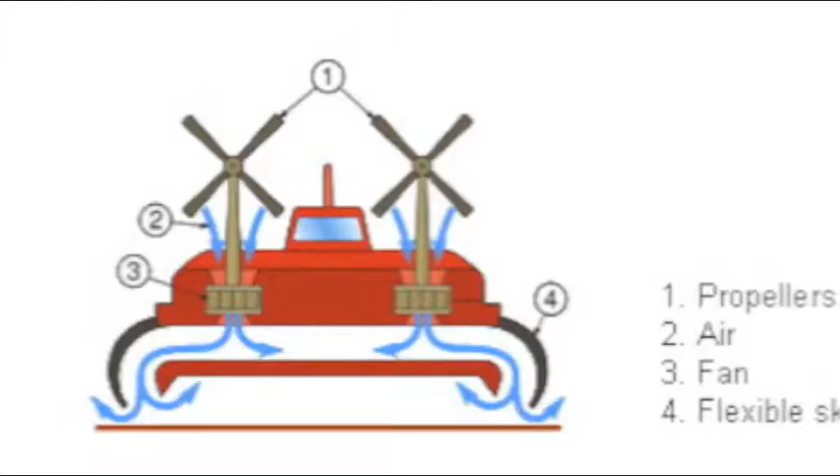First, we researched the history of hovercrafts. We looked at different hovercrafts made in previous projects. We then had to figure out how to use the different electronic parts such as servos, receivers, speed controllers, and motors.

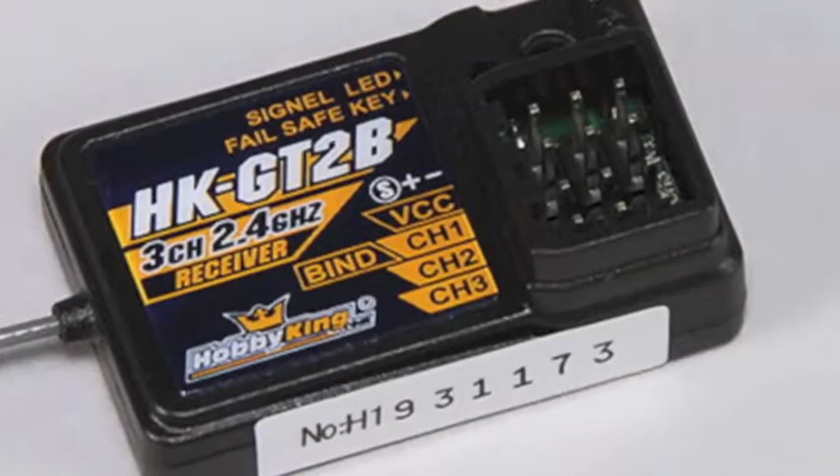For the design of our hovercraft, based on our team's research, I sketched out a blueprint that was a blend of hovercraft models.

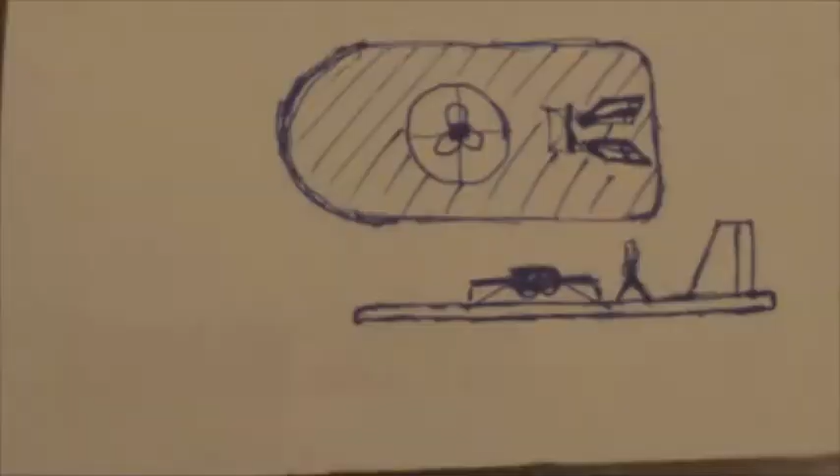Unfortunately, because this blueprint was a blend of multiple hovercraft models, it was way too heavy, and the fans in the back were not powerful enough to push the hovercraft forward. So we ended up modifying the hovercraft design, and we essentially took the skeleton of the first hovercraft design to make it lighter.

During the first test, our structure had 3 layers of foam board and a huge skirt. At this point, we hadn't mounted the motor, so you can see me holding the motor on top of the hovercraft.

For the second test, we removed all but 1 layer of foam board and secured the motor, battery, and receiver to the hovercraft. Awesome!

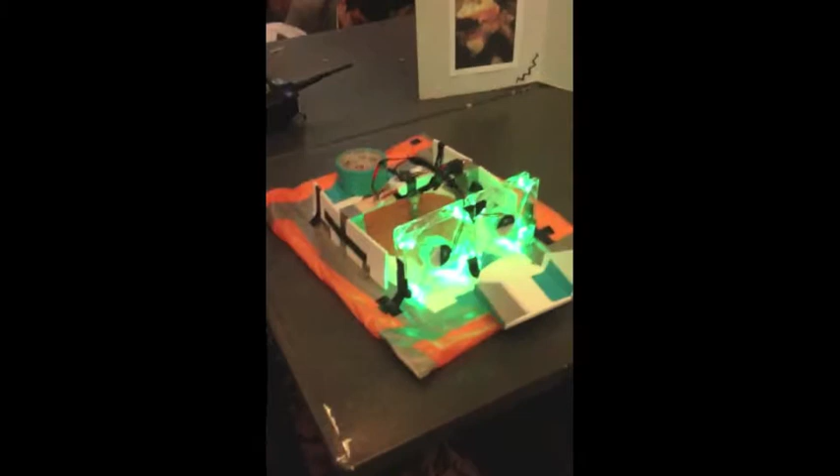The final test took place at Fed Day with our completed hovercraft. You can see the green LED case fans and the moving rudder on the back. The craft hovers and only needs a small push to glide across the table.

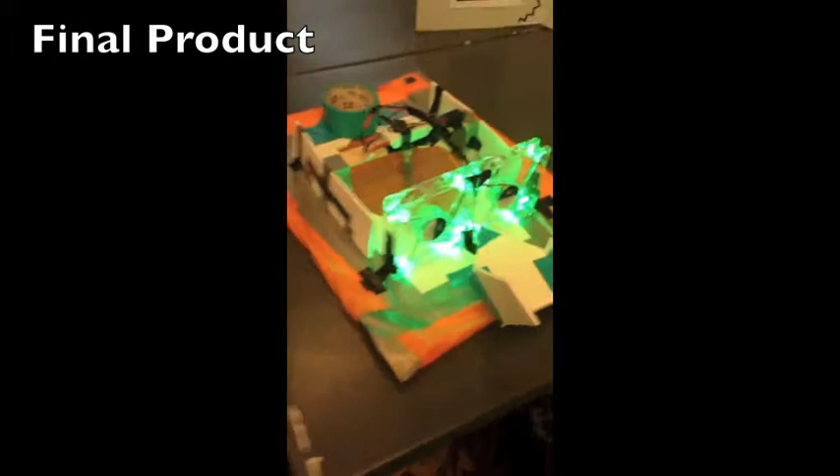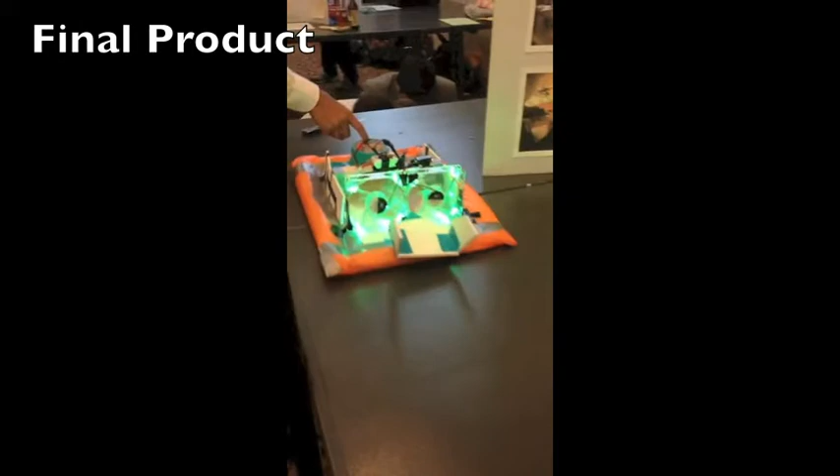It's good that we're doing this now. We can use the rudder. This is kind of wavy because the fans. I see. And then you can drag it around. Okay, and we have everything.

Because our hovercraft could not move in any direction, it couldn't complete the Fed Day challenge of moving across the track. We still felt like we did okay by successfully making the hovercraft hover, and we still learned a lot about how hovercrafts work. The hovercraft looks pretty cool too.

If we could do this project over, we would have planned more before buying our first materials. On our first trip out, we just went to Target and bought a fan there on clearance, and that turned out to be useless.

So we also wouldn't have bought our case cooling fans that we put on the back of the hovercraft, because it wasn't powerful enough to push the whole thing forward. Basically it took too long for us to realize what kind of fans were powerful enough to lift the hovercraft and push its own weight plus the weight of the hovercraft, so neither of those fans worked.

Our advice for next year's teams would probably be to start early and learn everything you can about your materials, especially the difference between brushed motors and brushless motors.

Also, local hobby stores are a really great resource. They have what you need, and the staff members are very knowledgeable, and they're always ready to help and just talk to you about your project.

However, keep in mind that hobby stores are expensive, and you can find better prices for the same materials on Amazon or another website. That's why we were saying start early, because you need to leave time for all of the materials to get to you in the mail.